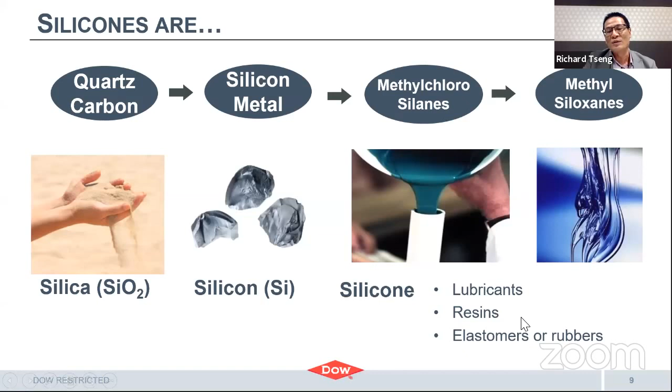We have several locations of finished plants all over the world, along with several R&D facilities together with the manufacturing facilities.

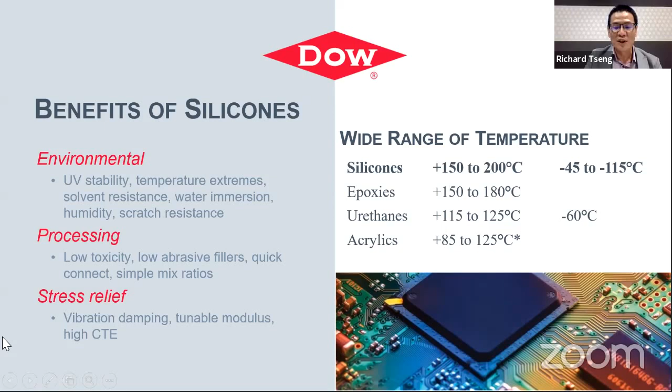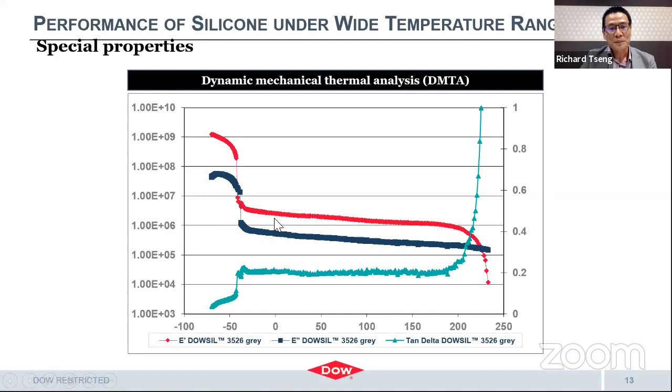Allow me to continue to share about silicone performance. In actual applications, comparing against reliability of the product, this includes humidity resistance, water resistance, temperature resistance, electrical resistance, and UV resistance.

In terms of humidity resistance, comparing silicone with other chemicals commonly used in the electronic industry, silicone will be the best to resist against humidity and water, because silicone has hydrophobic properties -- it does not like to keep water inside. It will not retain water inside the material. So silicone is one of the best materials, having a very low moisture absorption rate.

For temperature resistance, silicone will be the best. Earlier we shared the resistance of silicone under cold and hot temperatures because of the high bond energy of silicone's properties.

For abrasion resistance, this is one of the lowest scores that silicone will have, because silicone is not a hard and rigid material. It is a soft elastomeric material, so it will score less in this area.

For mechanical strength, silicone can be comparable with other materials because it also has high tensile strength. It can offer mechanical strength to hold things -- imagine a very heavy metal plate or glass that silicone can hold over the years without any failure. That's a good example in the construction industry.

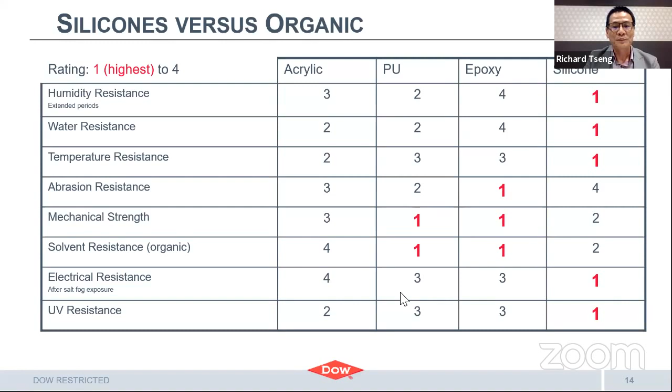Introducing Dow Performance Silicone brand, DOWSIL.

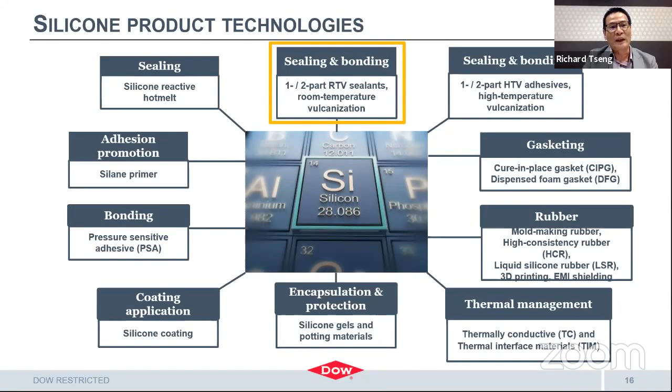This is a powerful brand that can provide a lot of silicone solutions to our end users and customers' applications. In this silicone chemistry, we can offer a range of materials that fit into customer applications in various ways, like sealing and bonding, gasketing, and silicone rubber for thermal management, encapsulations and protections, coating or conformal coating applications, for pressure sensitive bonding and adhesion promoter, for different ranges of products that we can offer to our end users and customers.

Allow me to share general knowledge of silicone curing technology, industrial knowledge that all silicone curing chemistry will be similar. Condensation cure is one of the commonly known types that people will use in some silicone sealants from DIY shops that you can find.

Condensation cure mechanism is a one-part RTV. In this one-part RTV, you can find several ranges of curing chemistry, either acetoxy, oxime, or alkoxy cure mechanism, or it can be a two-part RTV, where base and catalyst are mixed together to become a two-part RTV. One-part RTV is one of the common materials you can find from the DIY shop, so you can use it in your home applications as well.

Another curing mechanism is addition cure mechanism, or platinum cure mechanism. Under this addition cure mechanism, there are several ranges of products we can offer, either silicone rubber, adhesive sealants, or encapsulations.

We also have another curing mechanism called thermal radical cure mechanism. This is a different range of product that is able to cure in a fast manner, and users will have a different kind of process. They can offer fast curing mechanism as well, and without much other substrate prep, lesser cleaning is required for the substrate and mechanism.

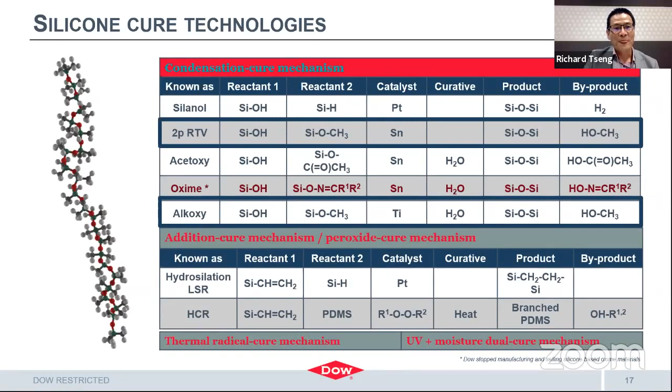To understand more about the silicone process, I would like to share a bit more about how one-part RTV, room temperature vulcanization cure, will cure when you use it on your product. When one-part RTV is dispensed on the substrate, it will react with the moisture from the air. It will start forming skin formations, and over the minutes, it will form thicker curing, needing about 24 hours to be fully cured.

So it's a slow curing condition, but it fits a lot of manufacturing processes, especially assembly and component fixings, without any issue. They can provide very stable adhesion over the years, and temperature-wise, both low and hot temperatures pose no issue. This is a very common material that customers choose because it's easy to process without requiring any oven or heat treatment, but it will take several hours to achieve full curing thickness.

This is because they cure layer by layer. Of course, we can make it cure faster by introducing a bit of higher heat, below 60 degrees Celsius, so that the curing conditions happen in a faster manner.

Another RTV is two-part RTV. This RTV is a little different from one-part—the curing mechanism cures homogeneously. When you apply base and catalyst together, they cure homogeneously. Within 4 to 8 hours, they can actually develop hardness to the maximum range, but to develop the best adhesion, we may need to wait about 2 to 3 days to achieve the highest adhesive conditions.

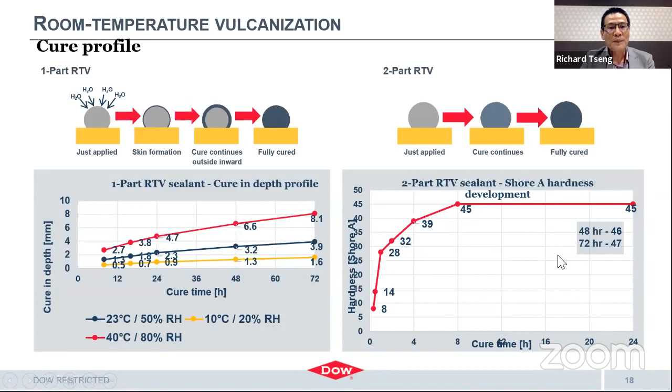Another curing mechanism we want to share is the platinum catalyst curing system—people also know this as the heat curing mechanism. This is used in the industry for potting, encapsulations, and adhesives for metal substrates, because this mechanism allows users to use the adhesive without requiring any moisture. They can cure it in the oven, or cure on demand—they can prepare the substrate, dispense the adhesive, and go into an inline process with an IR reflow oven, curing in the inline process. It's very convenient to use.

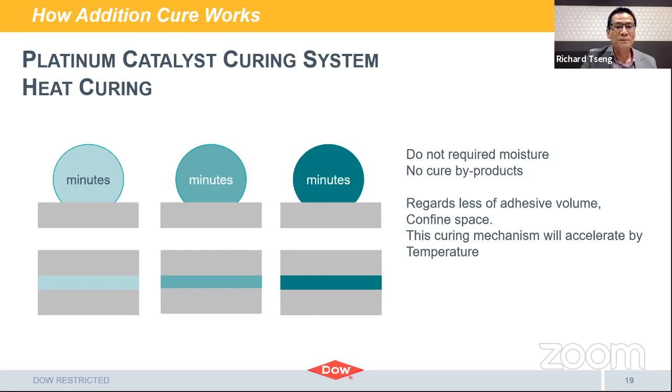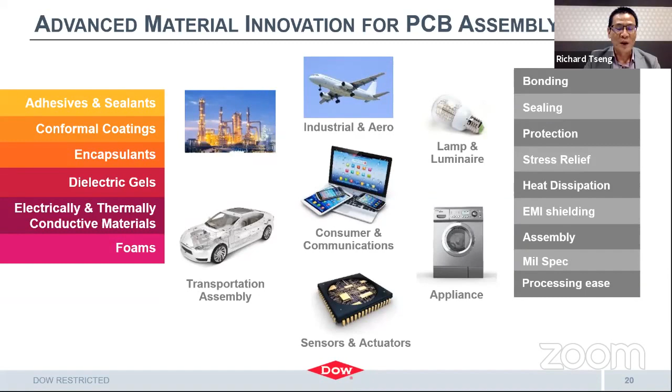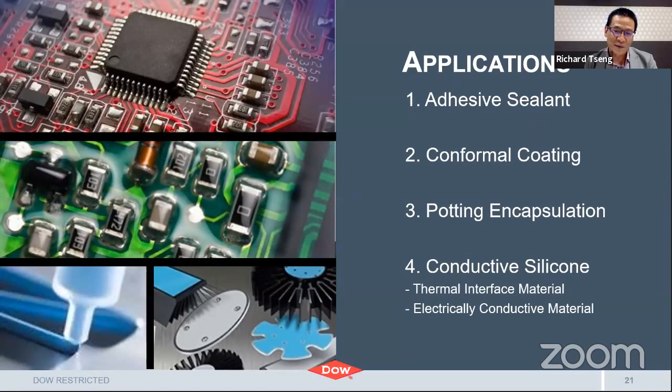In general, our product line can be categorized into 4 categories for easy understanding. The first is adhesive and sealant. The second is conformal coating product line. The third is potting encapsulations product line. The fourth we call conductive silicone solutions. Under this conductive silicone solutions category, we can offer either thermally conductive material or electrically conductive material.

So this is the time for our second polling.

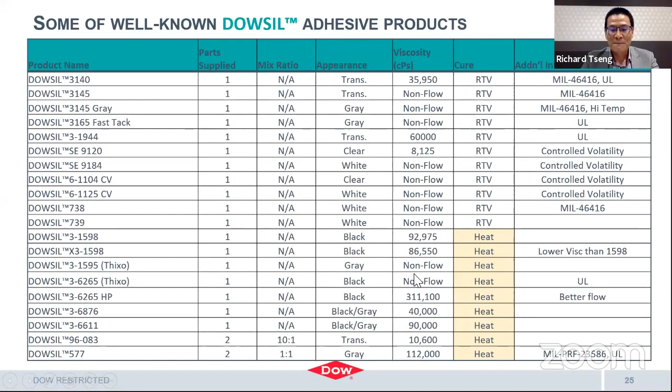For these sealings, our customer will use DOWSIL 3-1598 HP or DOWSIL 3-6265 HP to seal the whole unit and module without fail over the years, whether it's cold or hot inside the engine.

The third application example is IGBT module sealing. You can see this is the IGBT unit that we need to seal from the base plate to the housing. Our customer will use 3-6265 HP in this case.

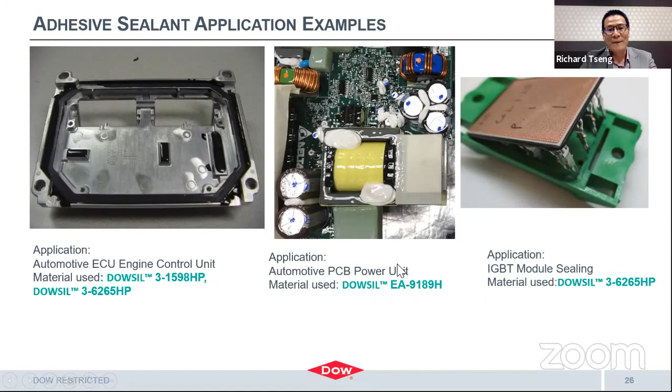Another product line is our conformal coating product line that can offer longer lasting protection for PCBs. So why is this PCB protection conformal coating required? You can see that with or without coating over the years, with conformal coating there will be no corrosion.

Without coating, corrosion can happen easily because of environmental impact that causes the metal substrate to become corroded, along with high temperature corrosion. Imagine the very thin layer of the PCB pattern being damaged within a few months, or a few years. PCB coating can also protect from mechanical stress, vibrations, and thermal cycling.

It increases insulation - sorry about that, this iPhone is crazy. This creates another insulation layer that can enhance the dielectric properties of the PCB patterns and components. So this is an example of how PCB pattern corrosion can happen.

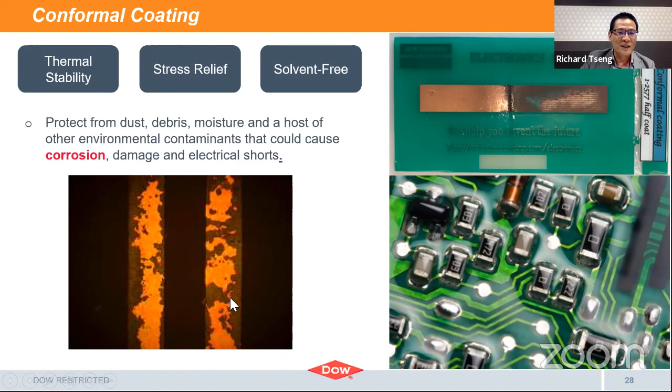A lot of customers designing products for very harsh areas, hot and cold, like to use soft coating material. We also have a solventless heat cure mechanism - it's a platinum catalyst curing. This kind of material is very convenient for customers who like to use dip coating or spray coating.

We also have several ranges offering elastoplastic material that can provide harder coating, so users may be protected from electrical, insulation, and mechanical vibration issues, as well as scratch protection. For some reasons, they will prefer harder coating for their product.

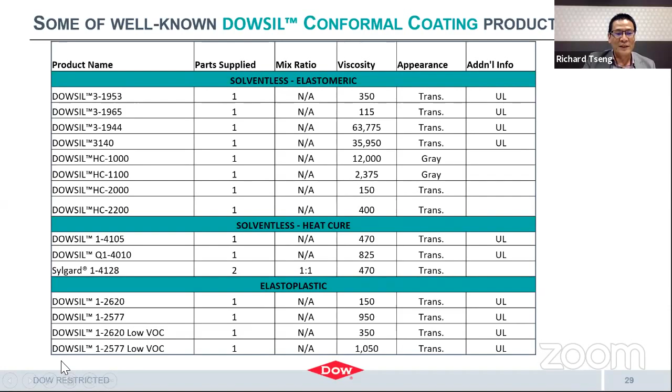So this is how customers use our conformal coating product line in their products. For example, I want to show this smart meter. Smart meters come in several ranges - it can be oil and gas, or a water meter, or electrical meter. There can be several smart meters, some outdoor and some indoor.

Another area is protected by sealing. For the high current area, why do they need to coat it? Because with high current and ion movement plus moisture, corrosion will occur. That's the reason we need to coat our PCB in the important areas to protect the circuit over the years.

In this example, DOWSIL SE-9186 clear is used. Another example is the smart gas meter that stays in outdoor applications. In this case, the customer will use DOWSIL 3-1953, a low viscosity material, for coating the whole PCB.

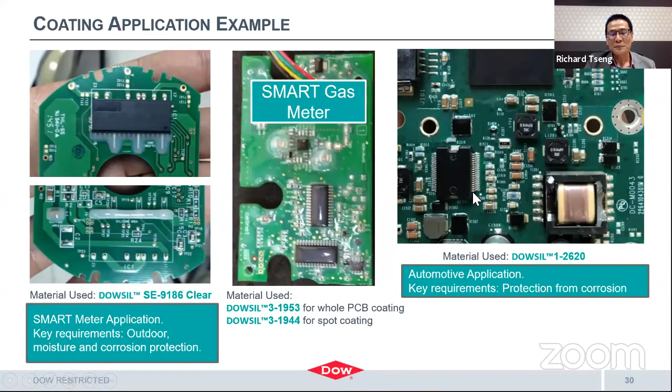So we have shared about two product lines. One is adhesive and sealant conformal coating. Conformal coating may be able to achieve coating thickness and height about 8 mil, maybe 10 mil maximum, about 250 micron. Over 250 micron thickness, conformal coating cannot achieve in one coat or several coats, that process may not be convenient for the end user.

So we can recommend spot protection as the example that we showed earlier, that spot protection can be considered. Spot protection coating over like 2mm or maybe 3mm and above, it may not be able to achieve that height that the user wants to protect their modules and components.

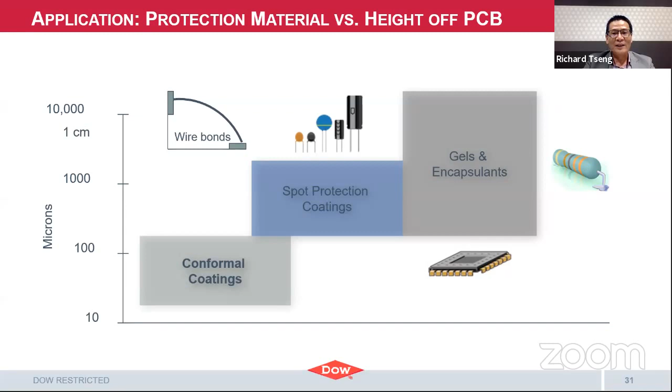So for such applications, we need to consider gel or encapsulation. For gel and encapsulation process, we can consider coating heights that can be higher thickness, or whole module sealing that can be applied with gel encapsulation material. So this is the time for polling.

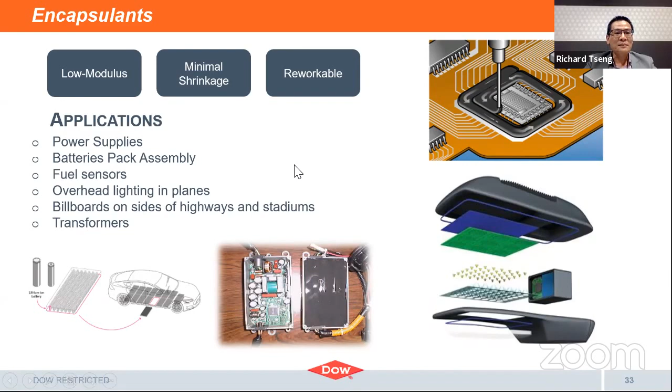So for potting encapsulation, we have two different ranges of product. One range we call dielectric gel, it's a soft elastomeric gel. They are very soft, that gel actually offers very low modulus and protection for very sensitive components against mechanical stress, and they are also better in terms of thermal cycling and very harsh environments.

And one of the best gel properties is that they can also recover, we call it self-healing properties. So allow me to share a little bit more.

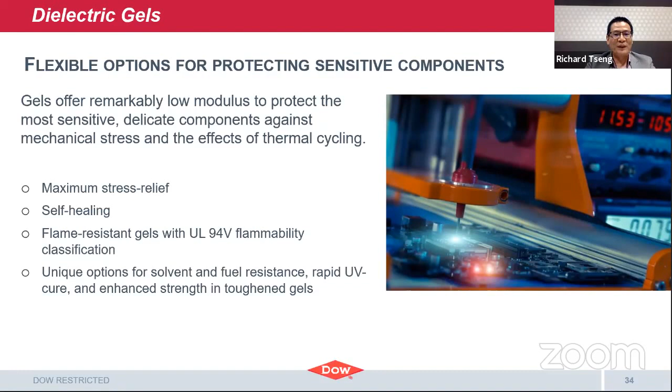So gel is soft elastomeric. Imagine there's a wire bonding application in the customer's design. Gel can provide a lot more stress relief for sensitive and very small components. This is where gel will be best, and they also have very good properties that allow them to recover any damage because they have mechanical adhesion itself and self-recovery. So they will recover themselves and close back the damage.

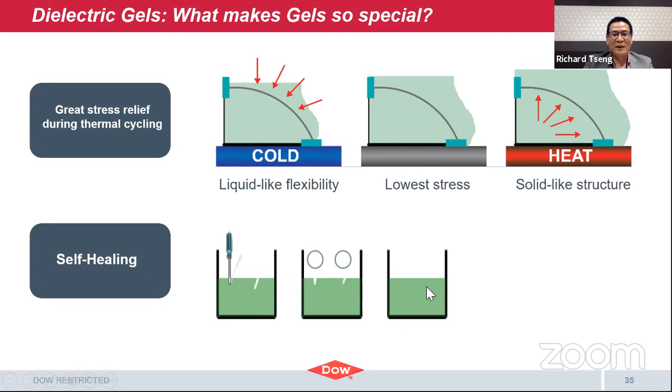So gel, comparing with normal encapsulant, will be very soft and can be used for very cold temperatures. Some gel materials stay very soft at minus 60 degrees Celsius, like specialty gel material for very cold temperatures, and they can also protect against very harsh environment mechanical vibrations for small and wire bonding material. Encapsulations in the range of rubber hardness, we could call it Shore A range, from Shore 30 to Shore A 50.

That range of material we use in several power supply module units, so that we can protect from impact and mechanical vibrations. At the same time, we also have thermal conductive mechanisms so heat can be absorbed from the components as well. So this is a comparison where we need to consider which solutions to use.

Gel will be the best for wire bonding applications or sensitive joints and component protection for several harsh temperature ranges. Gel will perform best, and encapsulations will be best for covering the components and modules, for impact protections, mechanical shock and vibrations.

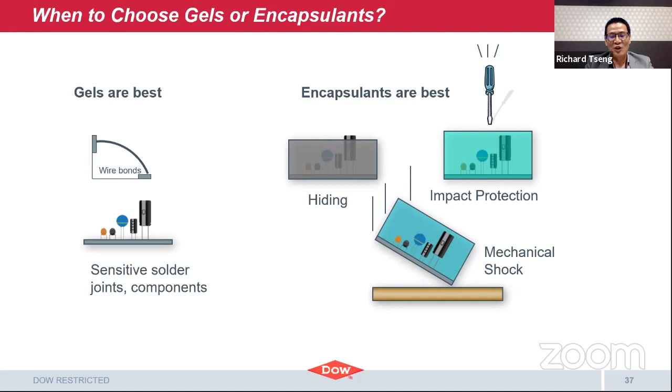So allow me to share some of the well-known products in the market, gel products. We can offer standard gel, for example 527 gel, which is very well-known in the market over the years, like 20, 30 plus years in the market.

You can see several ranges of gel product, either low temperature gel, or tough and a little bit firm gel, and also specialty gel that we can offer. UV-cure gel and fluorosilicone gel are for solvent-resistant applications as well.

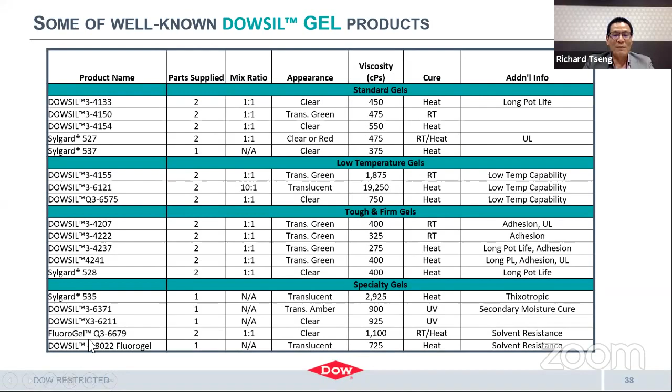And we do have a range of materials that can offer different ranges of viscosities and also different ranges of thermal conductivity for this potting encapsulation range.

So all of the potting encapsulation range use heat cure mechanisms, or what we call platinum cross-linking process, because RTV, either one part or two part, will take longer time to cure. So in general, this range of products are all platinum cure.

But we can still offer two-part RTV potting for some applications that need to cure only at room temperature, yet still want to achieve adhesion in some areas.

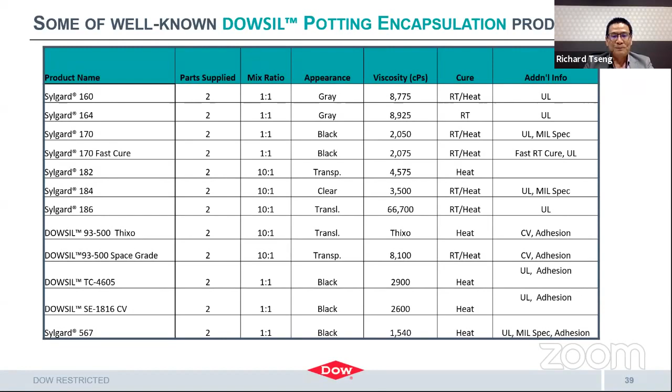So this is a success story of how gel is used in very high voltage applications and a very harsh environment, protecting very tiny wire bondings as well. So gel is one of the good materials that can stay soft even with high temperature exposure over the years. They can stay maintained soft. This is one of the gel properties.

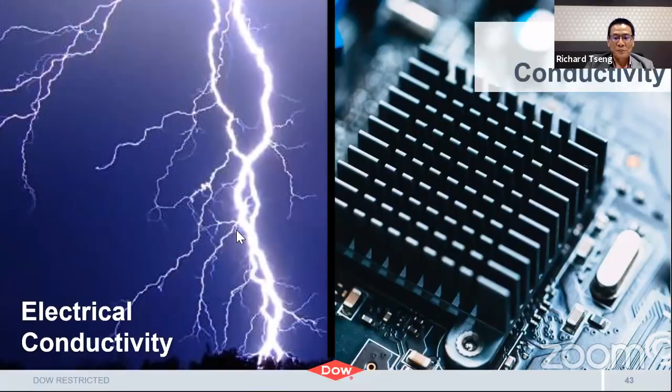Allow me to share that thermally conductive silicone product line. In this range, we can offer several silicone-based materials that are able to dissipate heat generated from modules, components, and ICs. For example, an IC will generate a lot of heat, and we need to get rid of heat from our module. So we need to use something that helps dissipate it much more easily.

A lot of electrical components have heat dissipation because of heat loss and power loss inside during the electrical process. So heat is one of the dangers that components and electrical products face nowadays. Temperature is one of the challenges we need to manage on our product.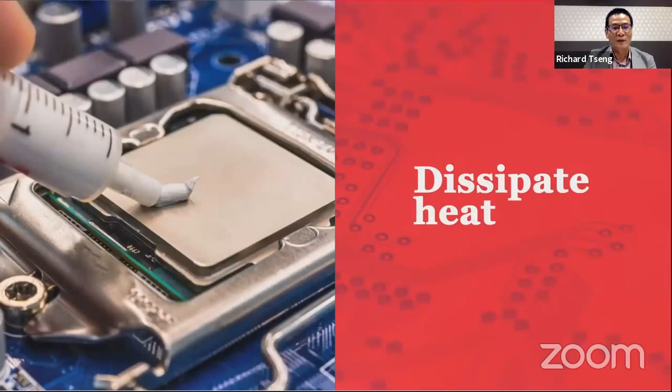At high temperature, the product's life cycle will be lower, and if we can keep the product in a lower temperature range, it can survive more years, with better safety and reliability. Imagine you have a heat source here, and we need to conduct heat from the heat source to the heat sink.

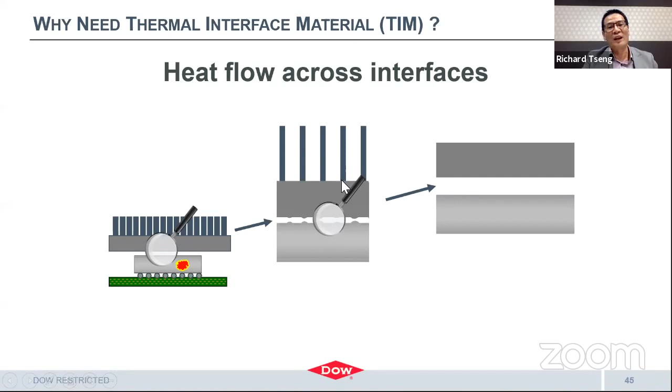We need to get rid of this heat, but without help from thermal conductive material, the heat cannot transfer easily because of thermal resistance from micropores and surface unevenness. They create a lot of resistance, so heat cannot conduct from one surface to another. We need something to help that heat transfer to another surface much more easily. We call it thermal interface material.

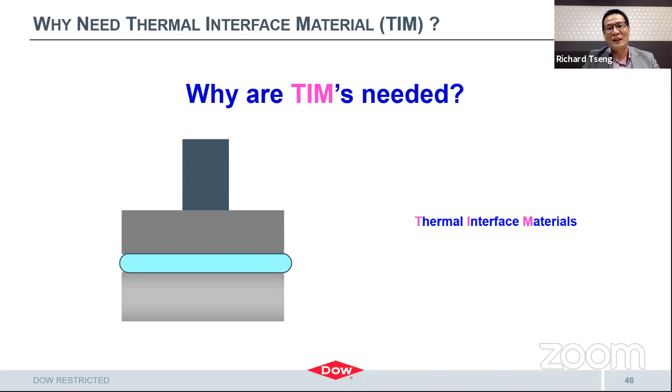That is the area where our silicone is the best fit. Why is it the best fit? Because silicone is a soft elastomeric material with high temperature resistance, handles thermal cycling well, and can maintain its properties without issue in hot and cold areas, and is very stable. So in this area, silicone is the best solution for customers.

In this range, we can offer several products with thermal conductivity, either adhesive or gap filler, thermal conductive compound, dispensable thermal pad, and encapsulations and gel that come with thermal conductivity. We can offer several ranges of thermal solutions for our customers' designs.

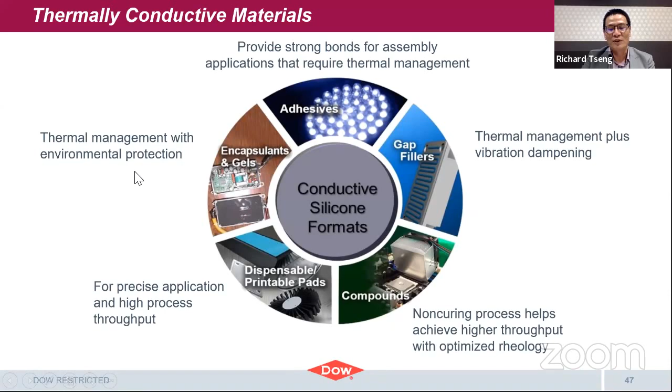Allow me to share an example of the conductive adhesive material portfolio. We can offer from very low range to higher range. It can be either one-part or two-part, heat cure or normal RTV room temperature cure, depending on customer preference and need. In their process, we can offer several ranges of solutions for customers.

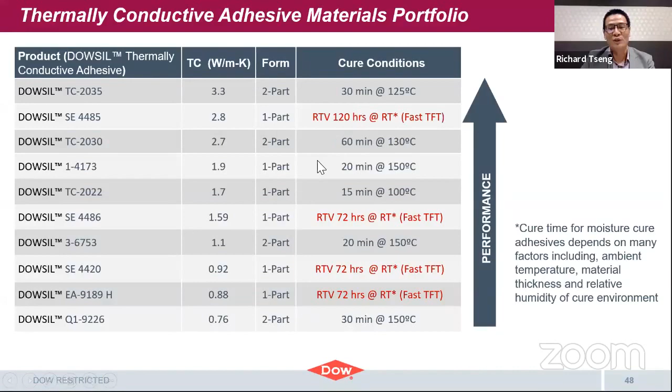We also can offer several ranges of conductive gap filler, thermally conductive gap filler, from 1.5, 1.9 to 3.5 watts per MK.

This material can be either one-part or two-part, and it's very stable and can hold vertical positions with 1mm or 2mm thickness as used in customer applications, without any failure in holding position, without any slumping.

They can stay soft and compressible over a temperature range of -45 to 150 degrees Celsius, and dissipate heat from the PCB module, and are very reliable for engines and control units as well.

For example, automotive engine control units use thermal conductive gap filler in ECU engine parts, to assemble the PCB and seal the whole module. This is an example of how gap filler applications are used.

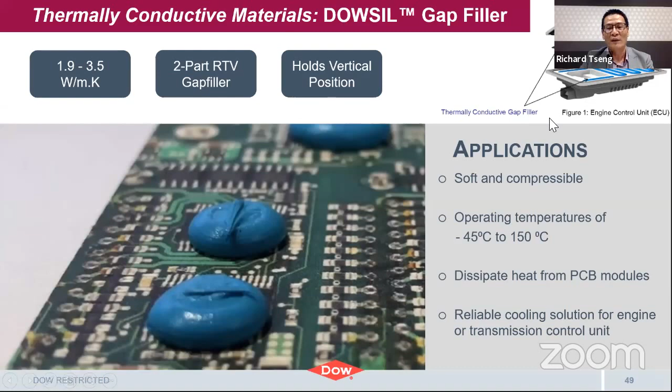Another example of gap filler applications in consumer electronics is the mobile phone. You can see the gap filler is used to conduct heat to the LCD chassis, which is die-cast aluminum that we use.

In this case, it's DOWSIL TC-3015, used to cool down the key module IC and dissipate heat to the chassis. This case was quite successful - the customer was able to repair and remove the thermal conductive gap filler much more easily without any residue.

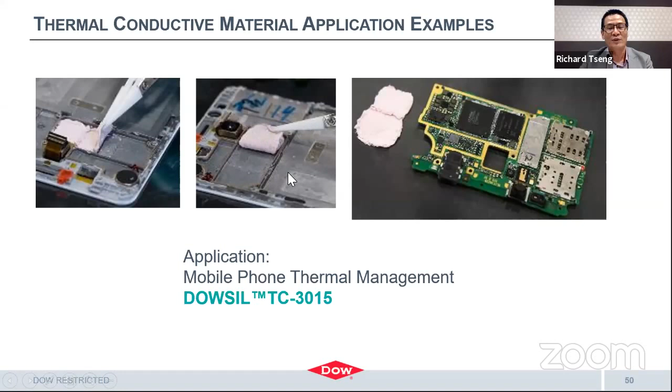So next product line is what we call electrically conductive material. There can be several forms, but usually customers prefer to use adhesive foam, or it can be a foam in a soft range, or adhesive that is able to cure at room temperature or in an oven curing mechanism.

So where is that electrically conductive material used, and why do we need it? There's electrical shielding, we call it EMI shielding. Shielding from noise coming into your product, or shielding your noise from going out of your device. That can work both ways.

In the market, data transfer is getting faster and faster, and we are also moving to 5G connectivity that requires higher speeds. Infrastructure also requires a lot of protection from external noise, and also regulations. We need to shield a lot of the high frequency leaking out to the environment and disturbing other electrical properties, components, and devices.

Design challenge is one issue for handheld devices, for example mobile phones, which are getting smaller and smaller. We may not always be able to use metal shielding housing. That can be a challenge. So one of the best fits is conductive silicone adhesive that is able to shield electromagnetic interference and also block other noise from coming into your devices.

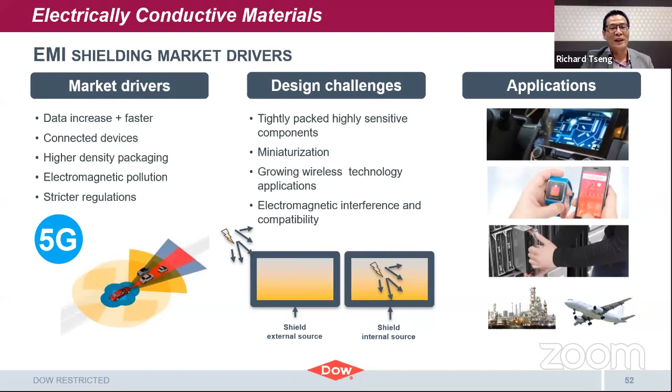Applications can range across automotive, consumer electronics, IT infrastructure, aerospace and the oil and gas industry. We can provide solutions that can be heat cured with several ranges of shielding capability, and we can also offer a one-part RTV type electrically conductive adhesive, across a range of options.

This is one of our newly launched products from last year, called EC6601, that can be cured at room temperature.

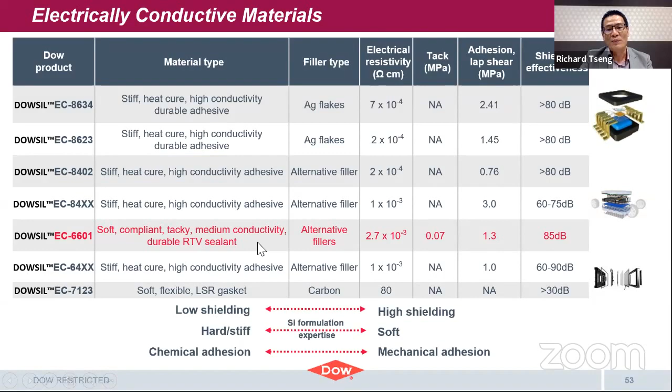So how is electrically conductive adhesive used? Just an example, for radar. In a radar assembly, there will be housings and PCB assembly, and there can also be heat sinks and another housing cover. In such a case, it's very important to shield these several key modules from external noises, for example mobile phone signals, where interference is very high.

So in order to shield this, we need very good grounding. Sometimes a normal screw touching the metal plate is not enough when high power and high frequency are involved.

So we can use, for example, EC6601 as a cure-in-place gasket. This material is dispensed on the conductive surface and cures at room temperature. Before assembly, they prepare this curing mechanism, and it becomes a compressible gasket that offers a much larger conductive surface area, so it shields better and shielding effectiveness performs much better.

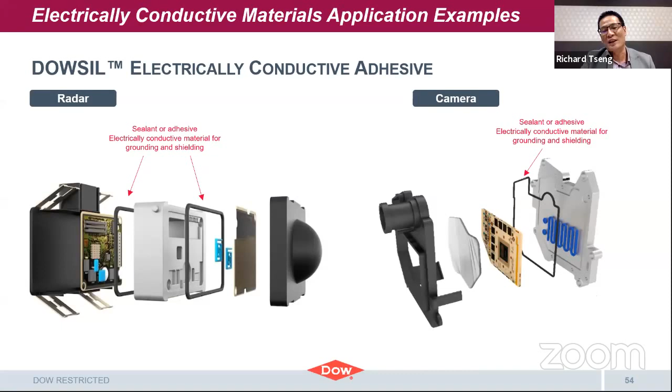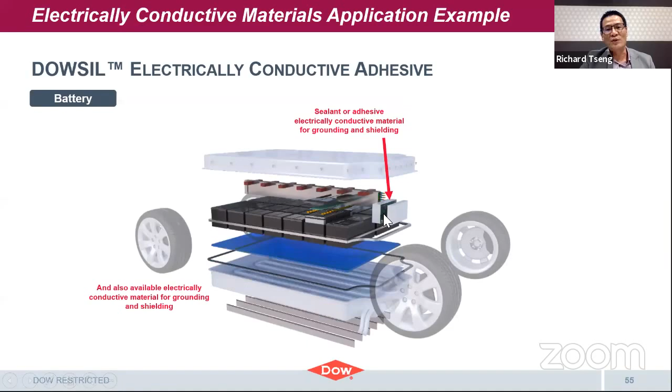So I'll end my presentation here and open the floor for questions and answers that you may have.